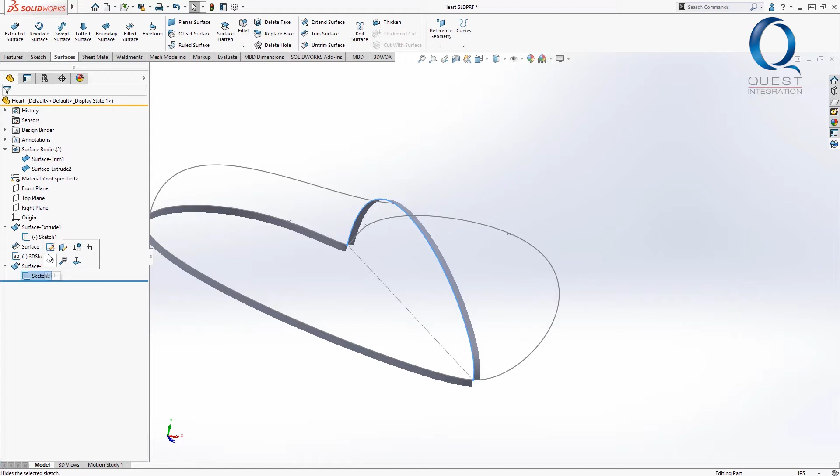And then what we'll do is we'll create another reference surface. You'll see it here in a second. And then I'm going to connect them with this spline in a 3D sketch. Here's my other reference surface. It's the center. And you can see I can control the spline handles there as well to give my heart a specific shape.

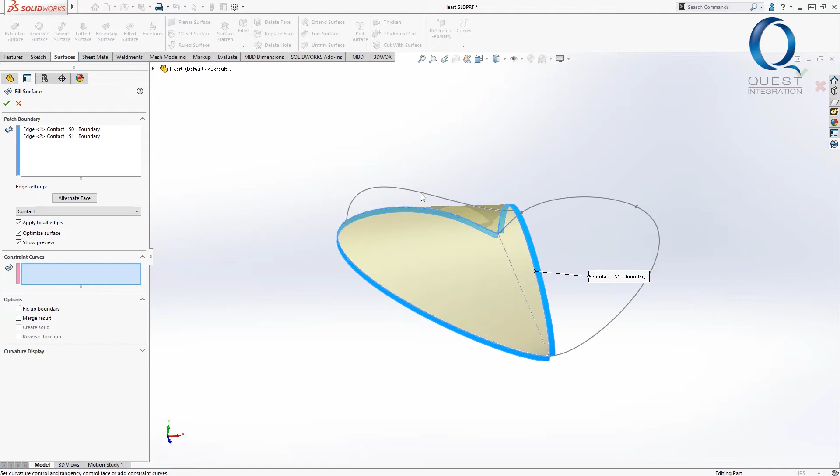And it's the same thing with that 3D sketch. It's also going to define the shape. And it might be easy for you to turn the sketches off to be able to make these surface selections easily, and then turn it back on to be able to get your constraint curve to really define the shape of the heart. And then notice in this case, I actually had to change it to curvature in order to get the shape that I wanted.

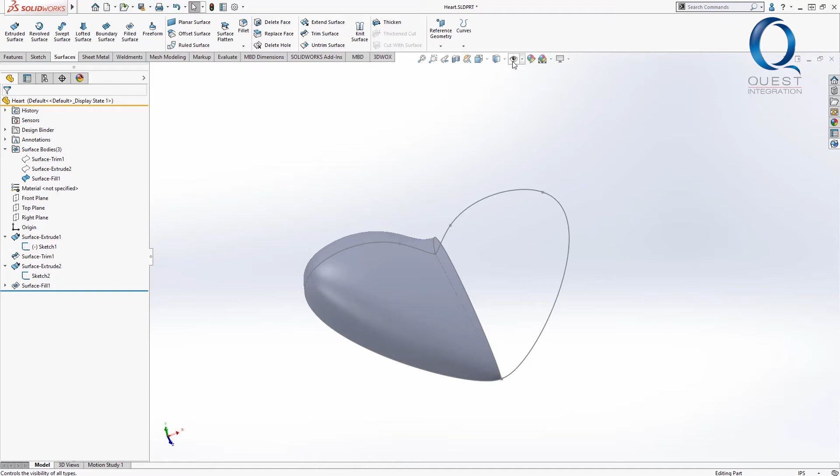After I get that done, I just need to mirror this. So I just go ahead and hide those bodies. I can also hide the sketches too. All right, I have my surface and my plane selected, so I can go ahead and do a mirror here.

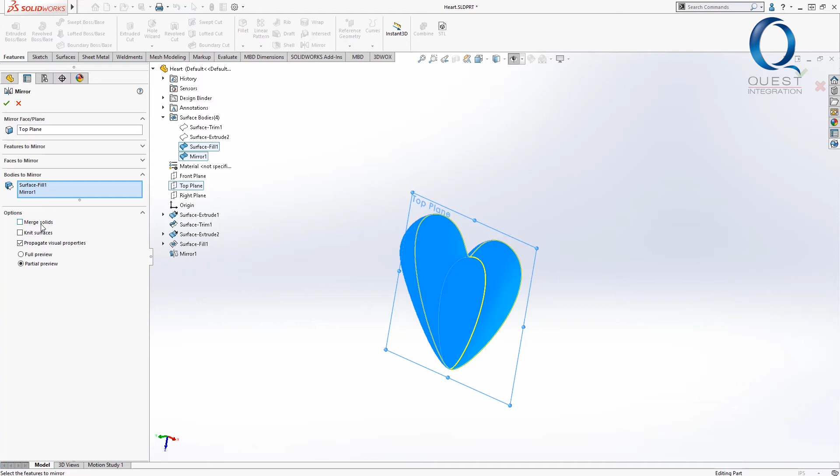And I can go ahead and do my second mirror to get all 4 selected. And there's a couple of different ways you can do this. You could use that merge solids, or you could just mirror all the surfaces and do a knit at the very end.

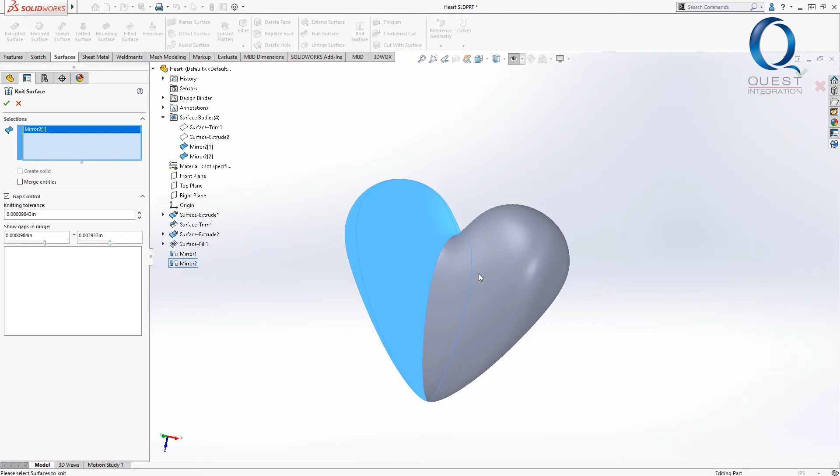Now, there's a couple of different ways you could make a solid out of this, just depending on what you did. I had missed a checkbox, and I need to go back in and combine these somehow. So I'd use knit surface to do it, or you could go back inside of the mirror feature. So we go and edit the previous mirror feature. We could knit the surfaces there.

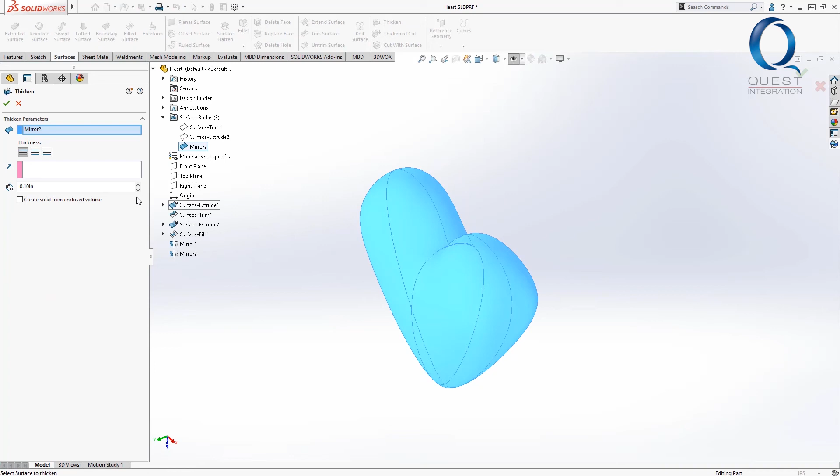And then we should have a single surface body. Or like I said, you could just use a knit to knit all 4 surface bodies together if that's the way that you did it. But either way, that will give you the ability to create a solid. Now all we need to do is change the color.